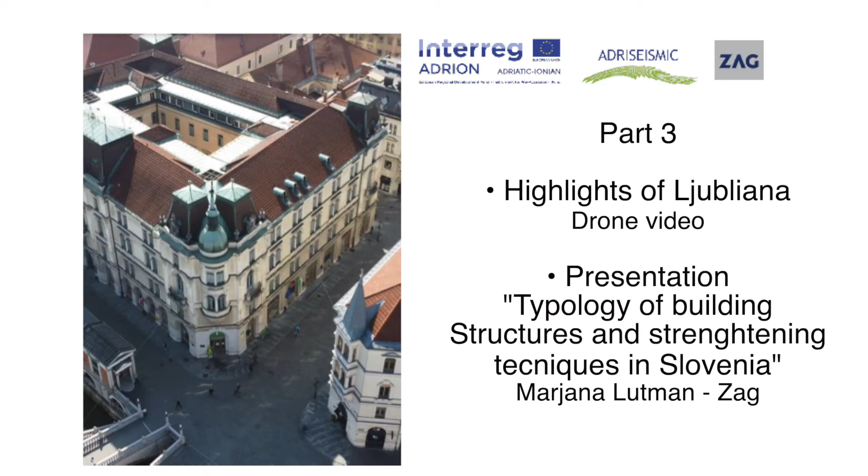Okay, now we continue with professional lectures. The first one, namely Typology of Building Structure and Strengthening Techniques in Slovenia, will be given by Marjana Lutman. Marjana Lutman is the head of the section for building structures and earthquake engineering at the ZAG. She has been employed at ZAG for more than 35 years.

Her main focus is in the field of behavior of masonry and reinforced concrete buildings under seismic loads. She participated in the reconstruction of the Posočje region after the last destructive earthquake in Slovenia. She has led and participated in several national and international research projects related to civil engineering.

As an introduction to Marjana's lecture, we prepared a video of the city of Ljubljana as a fairly vulnerable and heavily populated area. The most typical structural types are highlighted according to the typology of building structure throughout history. Some of them have already been seen in the previous Alia's video. Thanks at this point, Andras Krivic, for making this video. Okay, let's see the video.

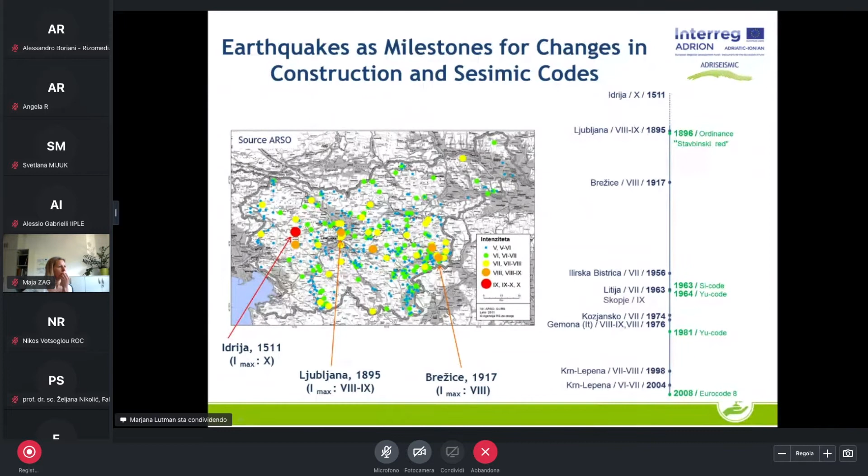It is actually a Renaissance castle with three defensive towers and a small clock tower. A Baroque renovation followed in the 18th century. In particular, the courtyard was renovated with semi-circular arcades and Baroque paintings. The last thorough renovation took place between 1988 and 2007 for today's museum. Regarding the structure, its foundations, walls, and even the columns supporting the arcades are constructed of stone masonry. Original walls above the basement and first floor were preserved, while wooden floor structures, as in other buildings, above upper floors were replaced by reinforced concrete slabs.

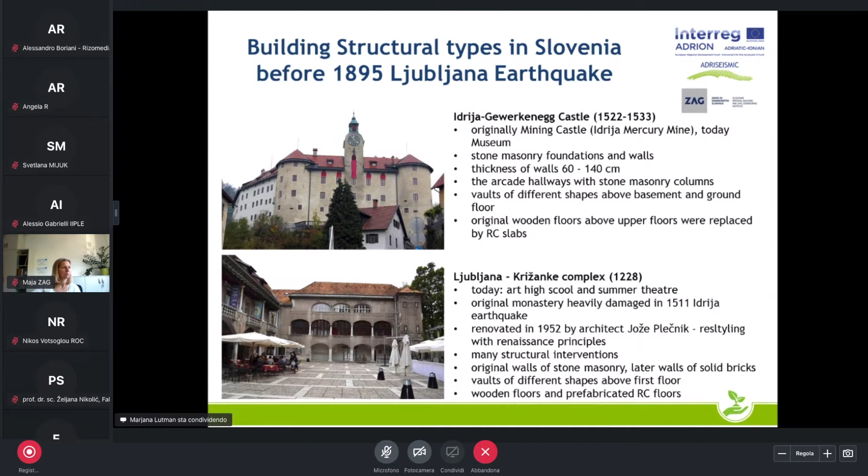That period after the Ljubljana earthquake, between 1896 and 1910, is known as the revival of Ljubljana. It is significant urban and architectural development, important steps in seismology and building construction, and social progress too.

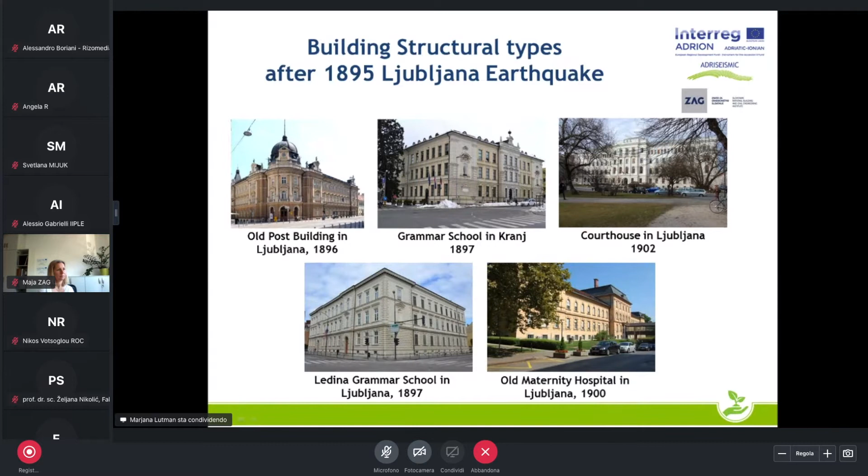Then after the Second World War, a floor was added in some buildings, like here above on the right side in the case of the Principal Courthouse building. All those buildings were constructed following the building ordinance from 1896. It is a very prescriptive type of code for solid brick masonry buildings which prevailed at that time. By this, 3 main structural characteristics have been achieved for an adequate seismic behavior.

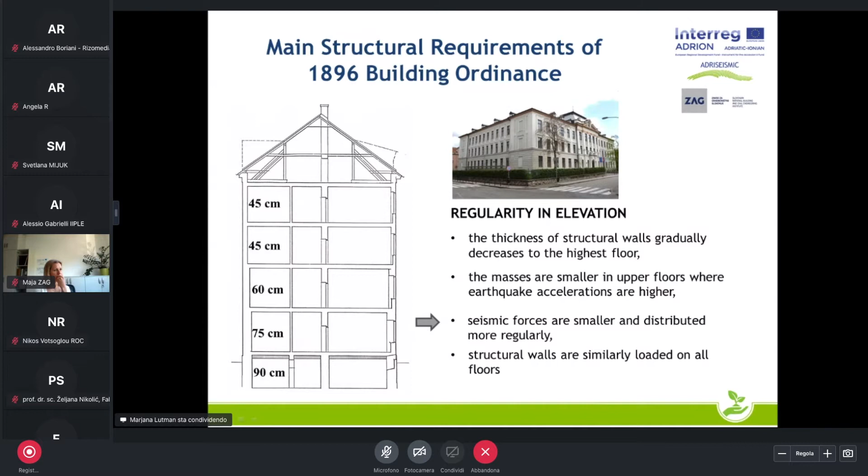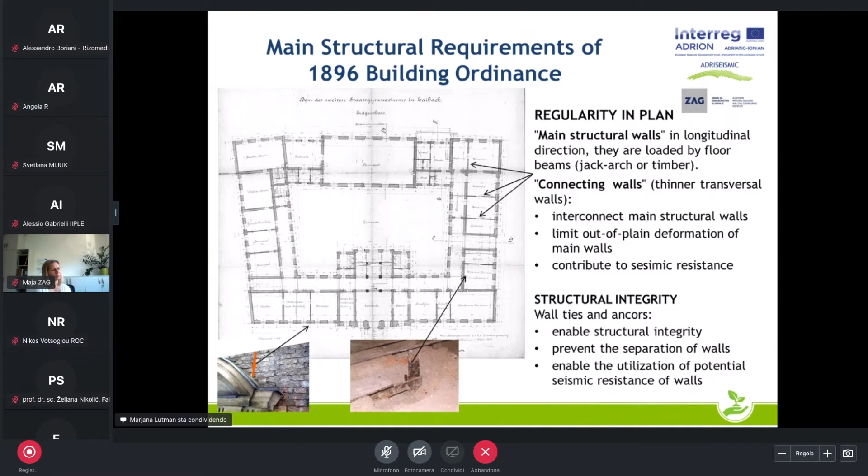So the next feature is structural integrity. Integrity which has been achieved by means of wall ties and anchors. We see below two pictures of these steel elements. They were placed actually in the middle of the wall thickness at every floor level in order to prevent separation of walls, so that the potential seismic resistance of the wall can be fully utilized.

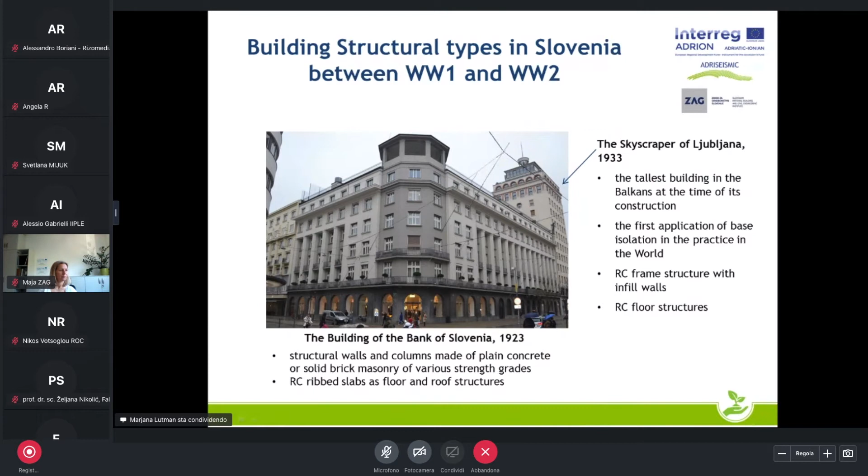So in the 30s, actually, this type of structure began. And here is an example, one of the first buildings with reinforced concrete columns. For this building, it is typical that reinforced concrete beams connect reinforced concrete columns only in the longitudinal direction, as we see along the wing. But in the transverse direction, there are only ribs of the reinforced concrete rib slabs, which are here as floor structures.

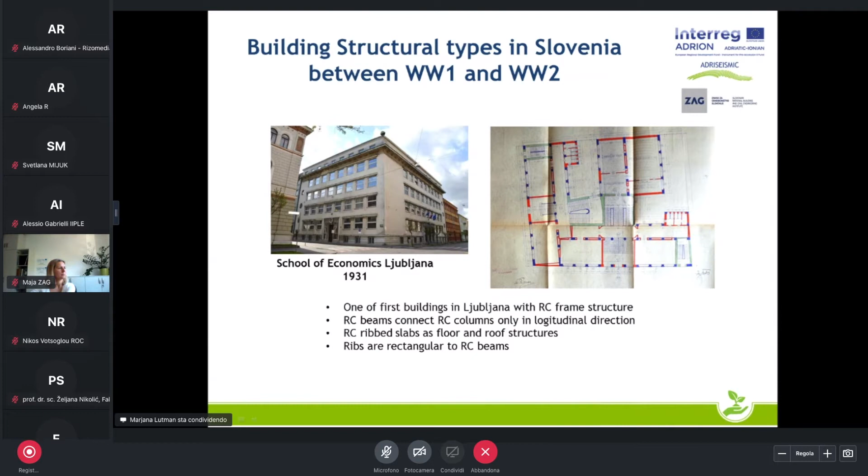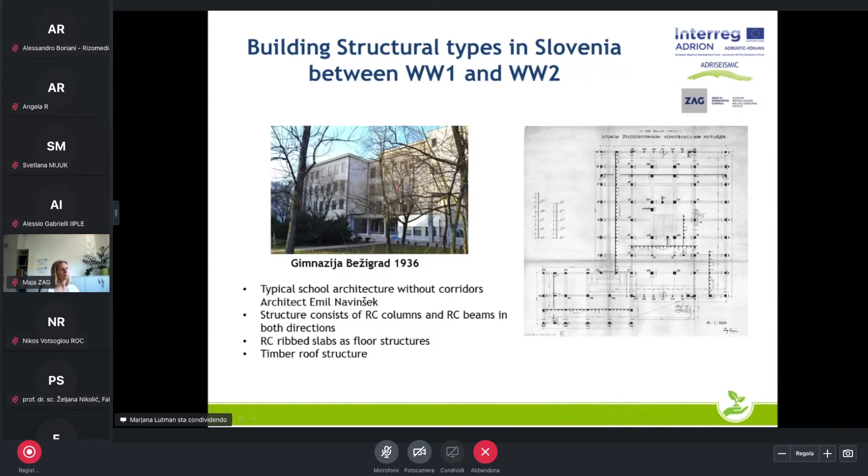Yes, here the next one, also a grammar school. It is famous because it's the international school of Ljubljana grammar school. It was designed by architect Emil Navinšek. His schools are very well known as a corridor-free architectural system, without corridors, but in a structural sense, it differs from the previous one. Namely, columns here are connected not only in one direction, but in both directions in plan, although the floor structures are also made as ribbed slabs here.

Now we go to after World War II, reinforced concrete frame structures, as here in Parliament, left above, and the school building next to it. They were public, and their structure is made of reinforced concrete. In the middle, actually, in the 60s, a lot of school buildings like this one in the middle above were built all over Slovenia, and it is also typical because of being without corridors.

The problem of these first reinforced concrete column buildings is that they are very slender, especially in the longitudinal direction. So it is the weakest direction in case of earthquake. On the other hand, residential buildings were still mainly constructed out of solid brick masonry.

Even some high rises here on the right side were constructed around 1960. They have 10 floors above the ground floor. The vertical structure consists only of solid brick masonry without any tie columns. Only 2 steel rods in each corner were placed. But 3 strength grades of blocks and 3 classes of mortar were used in this building.

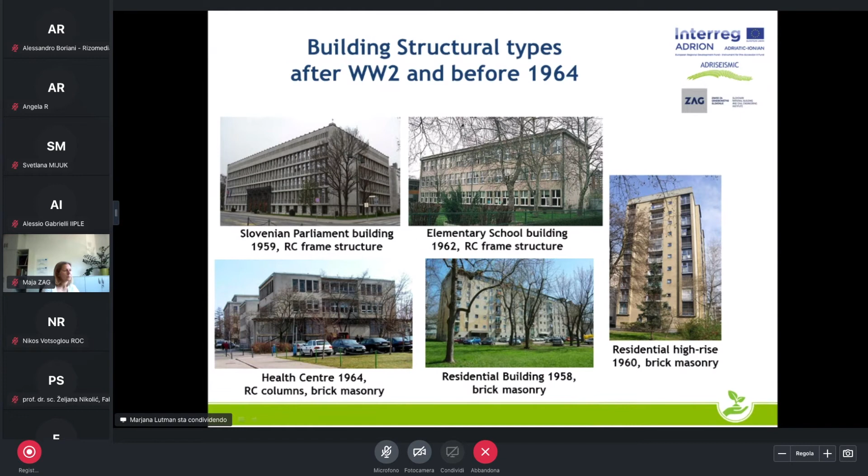That was the progress, and the masonry of higher strength is in the lower floors, of course, and the masonry of lower strength in upper floors. So it was a very optimized way of using available cement, which was a very rare material in those times. These high rises were designed to withstand a little horizontal action, not without it, according to a German standard, but only to 4% of the weight of the building.

So we come here to our first national seismic code. Both of them, which were enforced in Slovenia before the adoption of Eurocode, required the analysis and some minimal requirements. Among others, the first one limited the number of floors of masonry buildings. For zone 9, in which Ljubljana was situated here on the map on the left side, only 3 floors above the ground level were allowed for plain masonry and 5 floors for confined masonry.

However, according to our experience, some requirements of this code have not been always respected. Many improvements were brought about by the revised code in 1981, and although brick masonry walls were mainly replaced by reinforced concrete shear walls in that time in residential buildings, the revised code reduced the maximum number of floors for masonry structures again. In zone 9, plain masonry structures were no longer allowed.

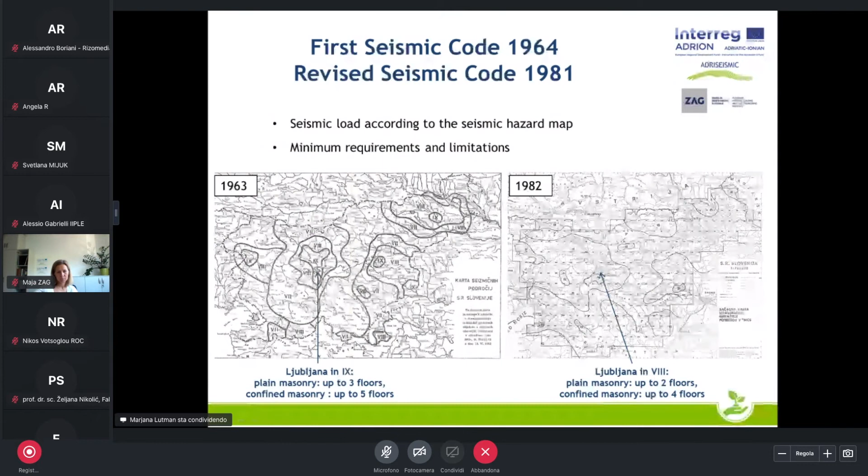For zone 8, where Ljubljana was situated on the new map on the right side, only 2 floors above the ground level were allowed for plain masonry and 4 floors for confined masonry. There were also some new minimum requirements for reinforced concrete structures, which actually prevented some anomalies observed in the previous practice. So here are typical buildings in the period that followed.

In the 60s, residential buildings were still built of masonry up to 5 stories as allowed, but it was confined with reinforced concrete bond beams, here on the left above. Besides, brick and mortar of higher compressive strength were used in the lower floors. In the early 70s, like here above in the middle, reinforced concrete replaced masonry. Shear wall structures prevailed in residential, school buildings, like here below in the middle, and other public buildings, while frame structures were mainly used for industrial and commercial buildings.

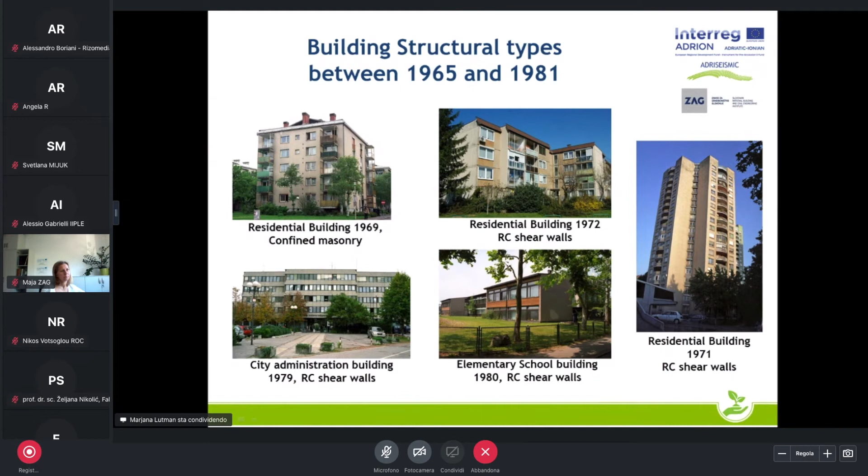Here is an example of the influence of the revised seismic code entering in 1981 with regards to the minimum amount of reinforced concrete shear walls. Namely, these are two adjacent multi-apartment buildings in the same neighborhood with the same architecture, as we see on the pictures, and reinforced concrete shear walls were constructed with the Outinord technology, which was very famous at that time. In both buildings, there are plenty of these Outinord walls, here in the picture in vertical direction, namely about 4% of the floor area. The problem here was the amount of transverse walls.

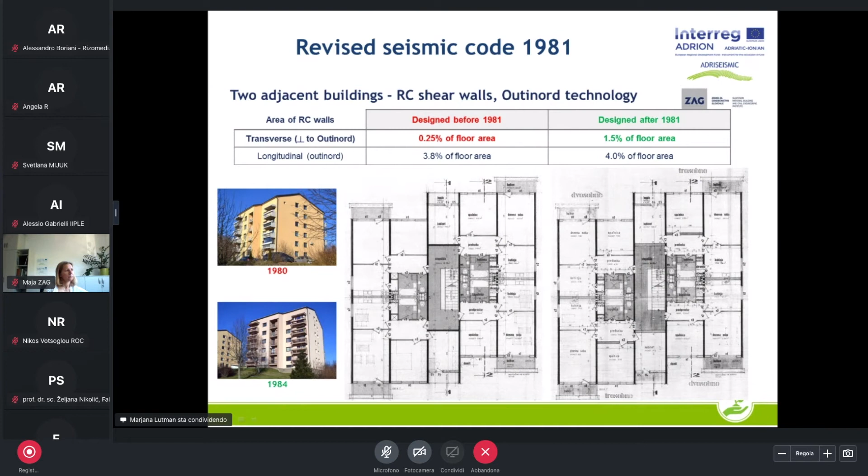In the building on the left, designed before 1981, the area of these walls amounts only to 0.25% of the floor area. All other walls in this direction are partitions or made of masonry. The newer building on the right was designed after 1981, and there are reinforced concrete walls instead of partition walls and masonry walls, and their area amounts to 1.5% of the floor plan, as required by the revised code. That is a significant difference in seismic resistance.

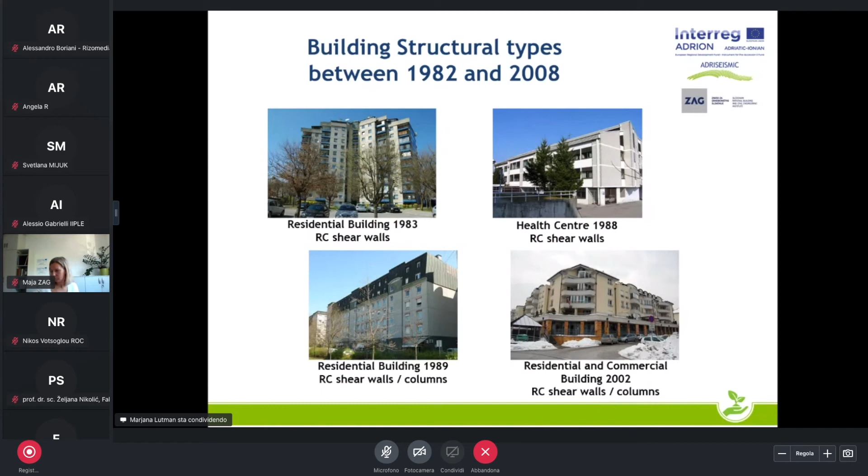So then reinforced concrete shear walls were the prevailing type of structures designed after 1981. They were verified also for shear forces, not only for bending moments as often previously. Many of such residential buildings do have shops and other service premises in the ground floor and garages in the basement. This is a problem because there are reinforced concrete columns in the lower floors and reinforced concrete shear walls in the residential floors, and it usually brings irregularity in the structure in elevation, and consequent problems with higher deformations already for vertical load.

And the second inadequacy is the lack of connections between structural walls and the lack of connection between walls and floor structures. And this feature allows out-of-plane vibration and the separation of corners and walls, and finally collapse of the walls.

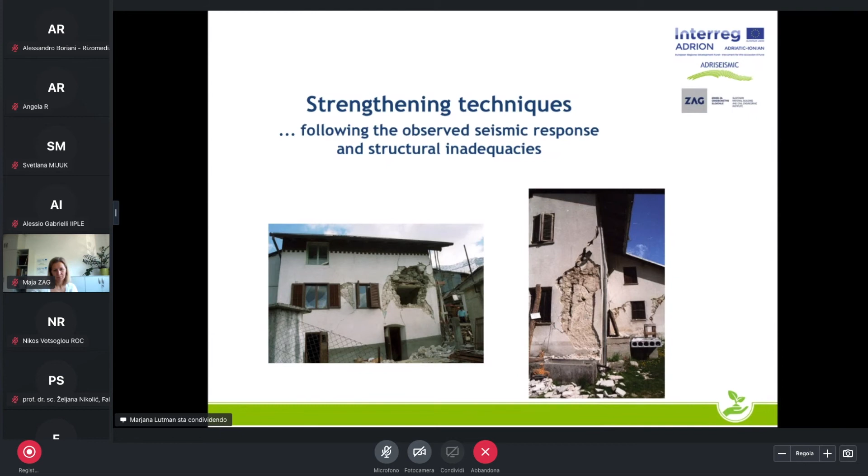First strengthening techniques were therefore developed for masonry structures and were widely practiced in the Posočje region, already mentioned, northwestern part of Slovenia, hit in 1976 by the Friuli earthquakes, which caused significant damage.

The most common technique for providing adequate structural integrity is placing steel bars on both sides of the wall, interconnected with stirrups. They are fixed at corners and intersections of walls, you see here on the right. For that purpose, they are threaded at both ends. Then they are fixed onto the steel plates and slightly prestressed by means of nuts. More details will be given by my colleague Mateusz Bergant later.

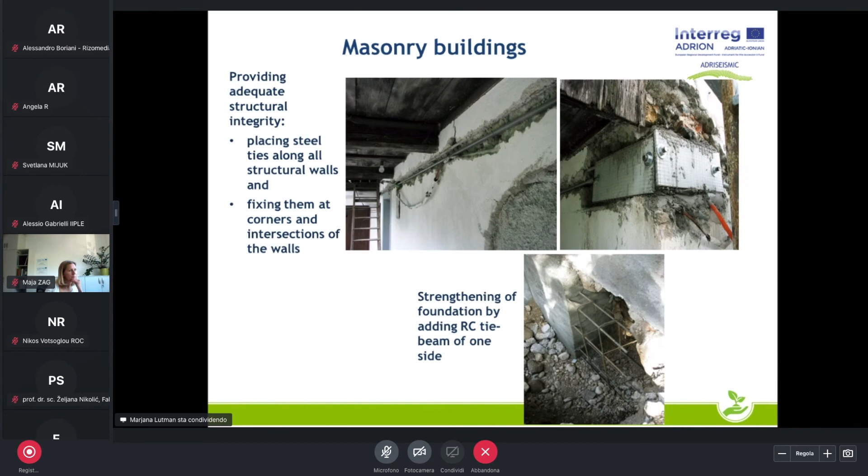Regarding the foundation, actually they were rarely the reason for inadequate seismic behavior of the buildings, but however, after the upper structure is strengthened and it is stable to resist higher seismic forces, there is again the need of strengthening the foundation. And the most common technique is a new reinforced concrete tie beam along the existing foundation wall.

Systematic grouting of stone masonry with cement mixture is intended to fill the voids and connect all components of the masonry into a whole. By this measure, the tensile strength of the wall can be increased by up to 2 times in case of very poor masonry. Sometimes even more. The details of these techniques will be, as already said by Matthias, explained and presented by Mr. Bergant. And I would only like to address that after the latest earthquake in that region, the procedure of the assessment of the effectiveness has been introduced.

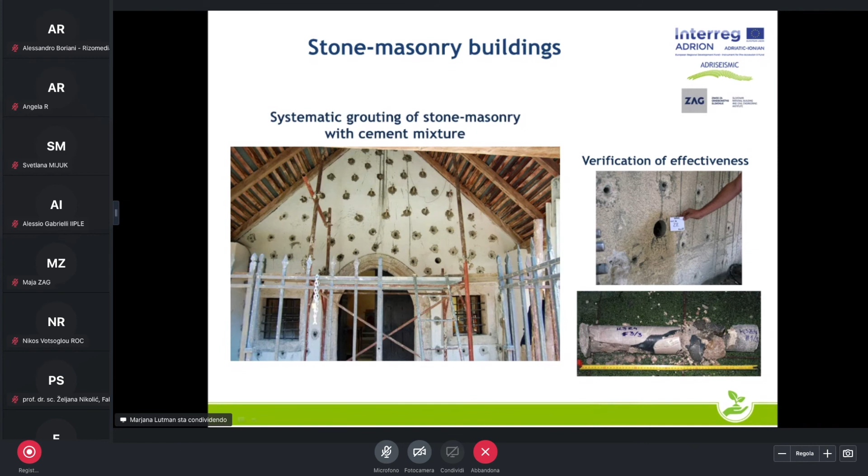Here on the pictures on the right side, we see that for that purpose, control holes are made into the previously grouted masonry. And from the appearance of the surface of that hole and from the appearance of the core taken out of the masonry, we can assess and judge the effectiveness, how the grout has connected all parts into a unity.

After the 1998 earthquake in the Posočje region, designers already had to make design verifications. And after the second earthquake, already by Eurocode 8. And all houses in that region which were intended to be strengthened were verified. For that purpose, they needed mechanical characteristics of the masonry in original condition and after grouting.

Therefore, in situ testing has been carried out in typical houses in the town of Bovec, like here, this building and around it. Here is one of the buildings where in situ testing took place. It was previously a police station. We will see it later again. One specimen was tested in original state, but it should be without cracks. And the other specimen was grouted.

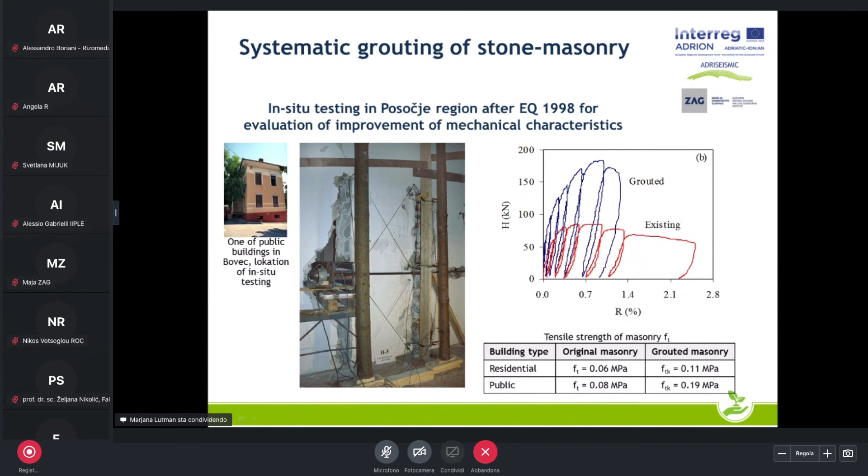Both specimens failed in shear, like the pattern that was observed, and the tensile strength of masonry in both states was evaluated. And by means of comparison of the results, we see that tensile strength is increased by around 80% in case of residential houses and even more than 100% in case of public buildings.

The next measure is reinforced cement coating. It is used for stone masonry walls if they are previously grouted and if there is a need for further increase of load-bearing capacity, or for solid brick masonry which cannot be grouted. As a rule, the coating is placed on both sides of the wall, and both coatings are connected together by means of anchors. In this traditional version, the coating consists of steel mesh in a cement mortar.

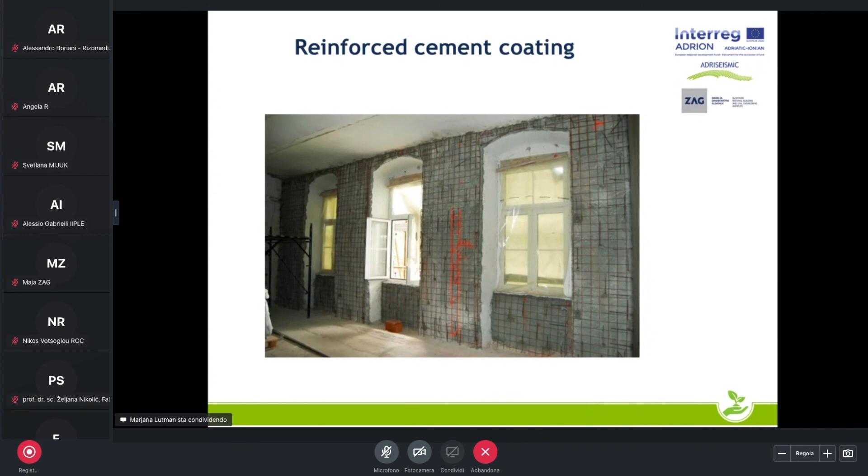Besides, carbon fiber reinforced polymer or glass fiber reinforced polymer coatings are also possible and are beginning to be used in Slovenia. In one of Ljubljana's buildings from the 30s, we performed in situ testing and evaluated the effectiveness of this measure. 2 specimens were tested, first in original condition and then strengthened with carbon fiber strips, which fully wrapped the wall. And as seen from the diagram here, this measure improved the lateral capacity of the wall by up to 60%, but importantly it reduced the deformation capacity by more than 3 times.

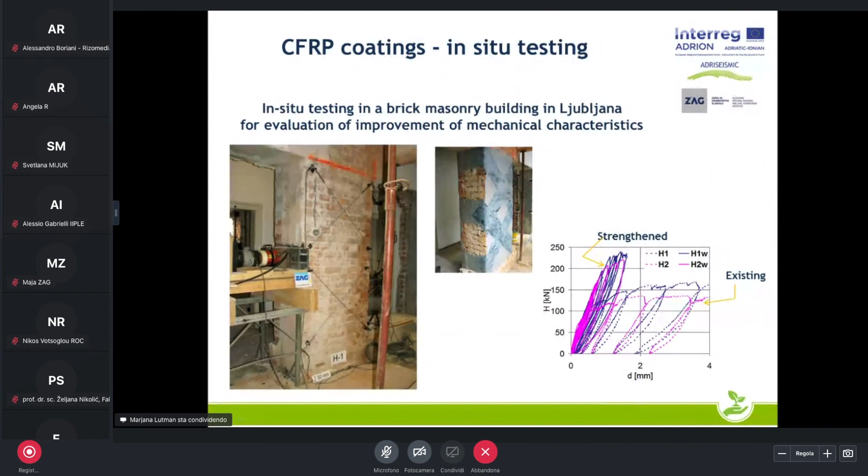Therefore, it is important that such a measure is placed on all walls in the building in order to prevent spoiling the original regularity of the structure.

And here is the slide showing extensive experimental research that has been recently carried out in the laboratory of ZAG, addressing the effectiveness of carbon fiber reinforced polymer if applied to hollow brick masonry. The damage of this full-scale model was typical for masonry structures in original and in strengthened state. Much larger drifts and damage developed in the first floor, the diagram on the right below, than in the upper two floors.

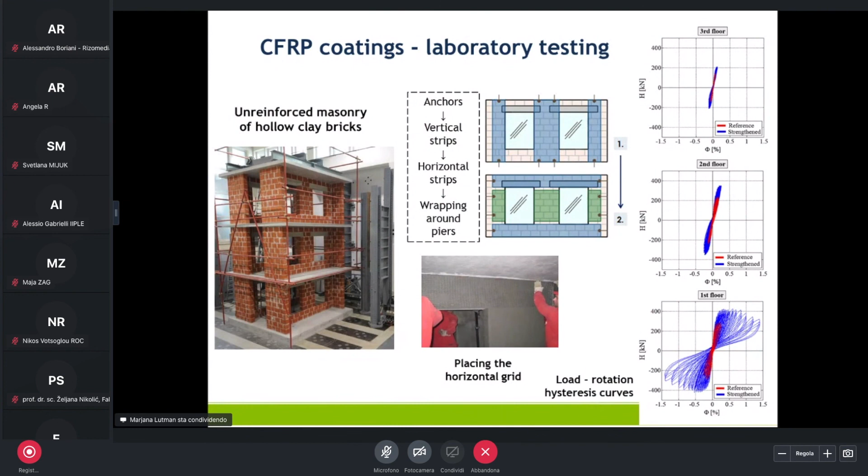One of the final findings was that the lateral resistance of the structure has been increased by around 50%. But we must keep in mind that this result is only valid for this type of strengthening applied to this type of masonry.